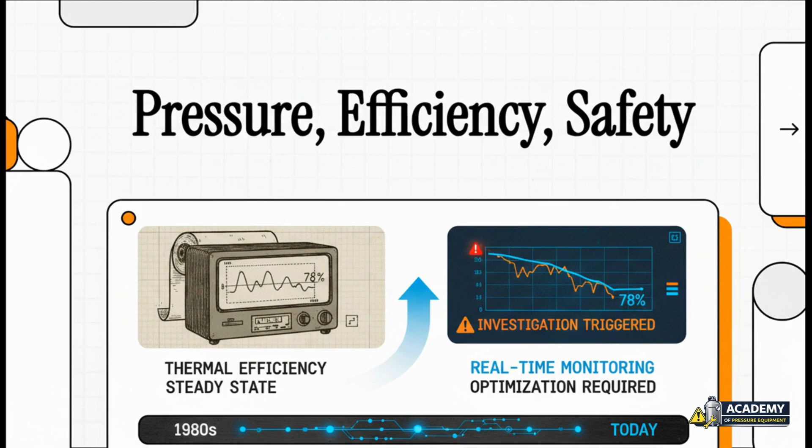Seeing that same number today, well, that would trigger an immediate, full-scale investigation. It's just incredible to think about the sheer scale of energy waste we used to accept as normal. I've seen it firsthand for over 40 years. And really, that's been the common thread through my entire career.

It honestly doesn't matter if you're talking about a brand new state-of-the-art chemical plant or a power station that's been running for 30 years. The basic physics of pressure and heat, they don't change. And neither, it seems, do the ways we just let all that energy escape. It's this massive problem that's hiding in plain sight. It's written in every steam plume you see and every pipe that's warm to the touch.

That's such a powerful image, Edmund. It really points to this kind of institutional acceptance of waste that's, well, it's pretty hard for us to grasp today. That 78% figure you saw scribbled on a chart recorder is now just one data point in a much, much bigger story. So let's really dig in and quantify the true scale of that inefficiency gap.

Exactly. And look, we're not talking about small, little incremental gains here. The difference between that old 78% standard and a modern condensing boiler system that can run at 98%, that's a staggering 20 percentage point gap. Now, stretch that across an entire industry, that 20% represents billions, with a B, billions of euros in wasted fuel and completely needless emissions year after year.

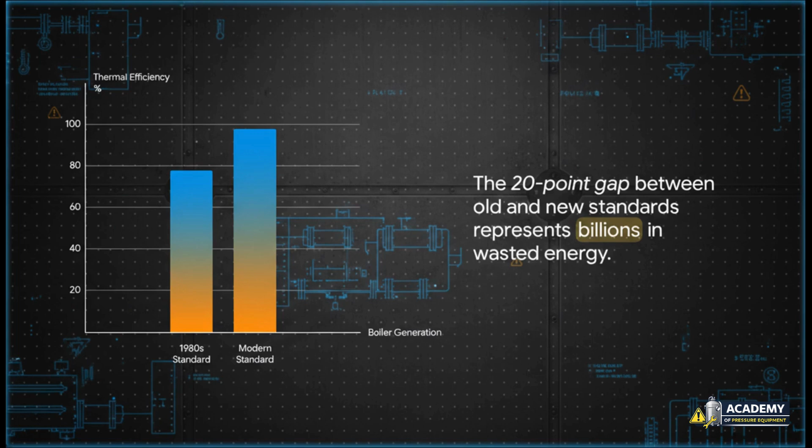It is literally the difference between legacy design and what we can actually achieve now with proper control and heat recovery. A 20-point gap, that's a massive target for improvement. So when you're on site, boots on the ground, what are the biggest culprits? Where is all that energy actually escaping from the system?

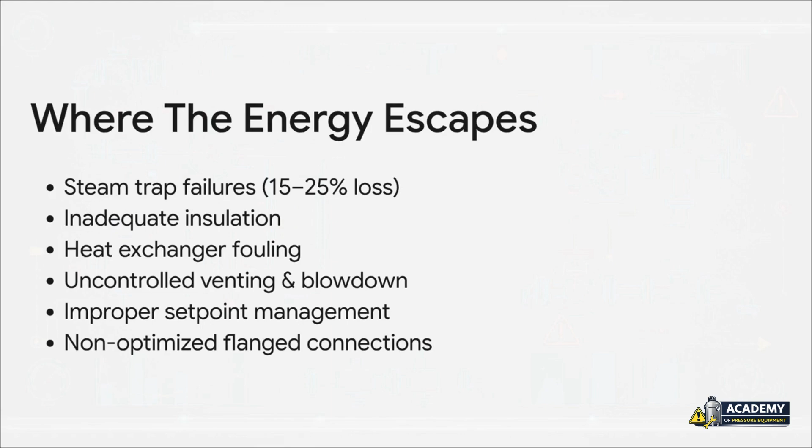Oh, it's a depressingly consistent list, I can tell you. The biggest, loudest offender almost every single time is steam traps. You can walk into an older facility and find that a quarter of them have failed open, just hemorrhaging high-pressure steam straight to the atmosphere. After that, it's all the basic things people forget. Pipes that should be insulated but are bare, heat exchangers that are just slowly choking with buildup, and every single one is a significant and, more importantly, a correctable loss.

And fixing those losses, well, the way we do that has changed dramatically, hasn't it? You've said before that the biggest shift you've seen in your career wasn't in metallurgy or vessel design, but right there in the control room. It seems the move from analog to digital has completely redefined what it means to be an inspector.

Without a doubt. The most profound shift in my 40 years on the job wasn't about better steel. It was about better data. We've gone from being physical detectives to digital forensic investigators. The evidence trail isn't on a clipboard anymore, it's on a server.

Back in the 90s, an inspection meant clipboards, thick logbooks filled with handwritten notes, and physically walking the plant to check gauges. Now, the very first thing I ask for is the audit trail from the distributed control system, the DCS. I want to see every single pressure excursion, every alarm that went off, every single time an operator had to switch a control loop to manual.

That digital log, it's now as crucial for assessing safety and conformity as an ultrasonic scan of a weld. It tells me the real story of how that plant has been operated, not just the idealized version in the design documents. Right, and that data-driven approach is now actually formalized in our safety standards.

When we talk about these automated safety systems, you'll hear a key term come up, SIL. For everyone listening, a safety integrity level, or SIL, is basically a formal way of measuring the reliability of a safety system. It's all laid out in the international standard IEC 61511. It puts a number on the risk reduction that a system gives you, like a system that stops a vessel from overpressurizing. And for high-risk equipment, verifying this is now a huge part of your assessment, Edmund.

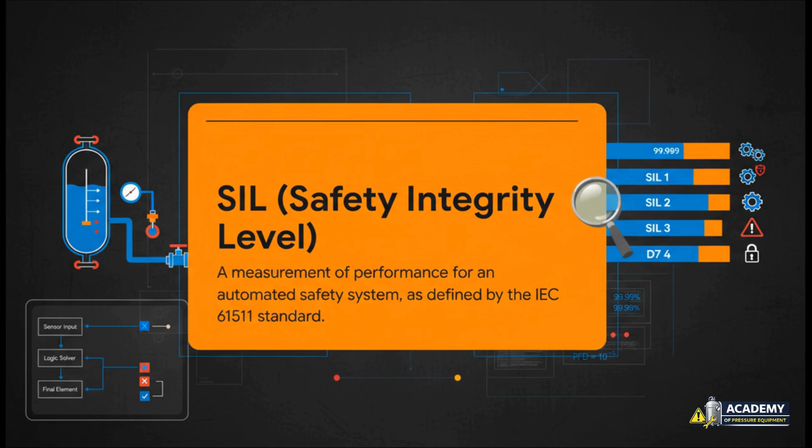That's absolutely right. And the quality of that safety function, and frankly, the entire control system, it all depends entirely on the quality of the data coming in. The sensors we use today, well, they're what made this whole digital revolution possible in the first place. Okay, so let's talk about that evolution.

Because the ability to actually trust that DCS audit trail is directly tied to how sophisticated the instruments feeding it are. How has that technology changed over your career? Oh, it's like night and day. In 1984, all we had were analog gauges. You literally had to trust your own eyes.

Then, in the 90s, we got the first electronic transmitters, which was a huge leap. But then the 2010s brought wireless protocols like WirelessHART. Suddenly, we could put sensors on remote parts of the plant that were total blind spots before, and we could spot leaks or failing insulation.

And now, in the 2020s, we've got fixed thermal imaging cameras tied right into the control system, constantly scanning for hotspots. We can literally see the energy being lost in real time. These new sensors aren't just measuring, they're diagnosing their own health, which gives us a level of trust in the data that we just never, ever had before.

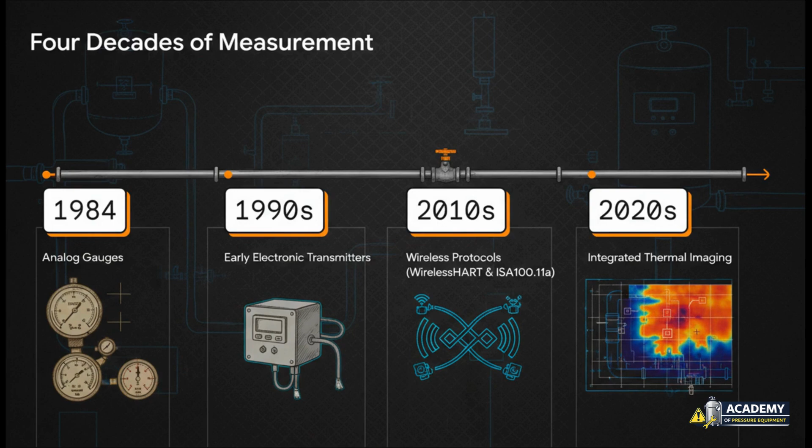Okay, so we have better control systems, and they're being fed by much smarter sensors. Let's ground all this in reality. Can you give us a few specific, anonymized examples from your actual field reports where this tech has made a concrete, measurable difference to both efficiency and safety? Of course. The theory is one thing, but it's the results out in the field that really matter. I've got 3 cases that I think illustrate the impact perfectly.

Okay, so the first one was at a refinery over in Central Europe. They had a crucial heat exchanger that was just heavily fouled. It was operating at only 61% of its design efficiency. To make up for it, they were just burning more and more fuel in another heater downstream.

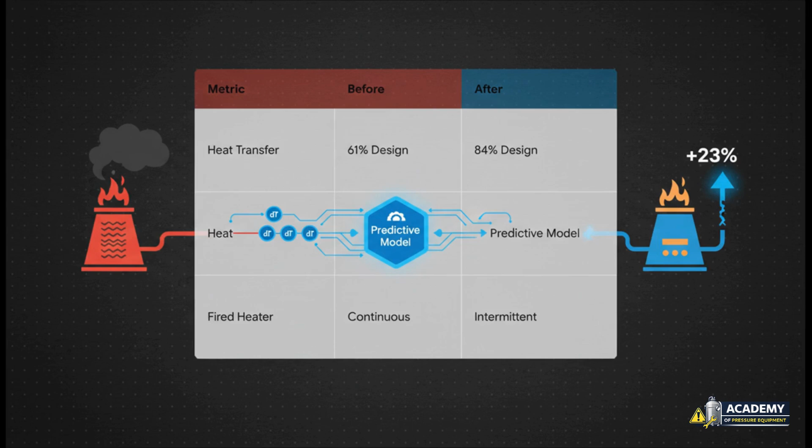So they installed a simple network of temperature sensors and fed that data into a predictive model. This allowed them to schedule their cleaning based on actual performance, not just some date on a calendar. The result? They recovered 23% of the lost heat duty. And get this, that was enough to take an entire fired heater out of continuous service. So that's a direct, massive fuel saving right there.

But what about the connection between better control and the actual life of the asset? Well, this second case from a chemical plant in Germany is a perfect example of that. They had a group of process vessels that were suffering from chronic pressure cycling. The pressure was just constantly going up and down, all because of a poorly tuned control loop in their DCS.

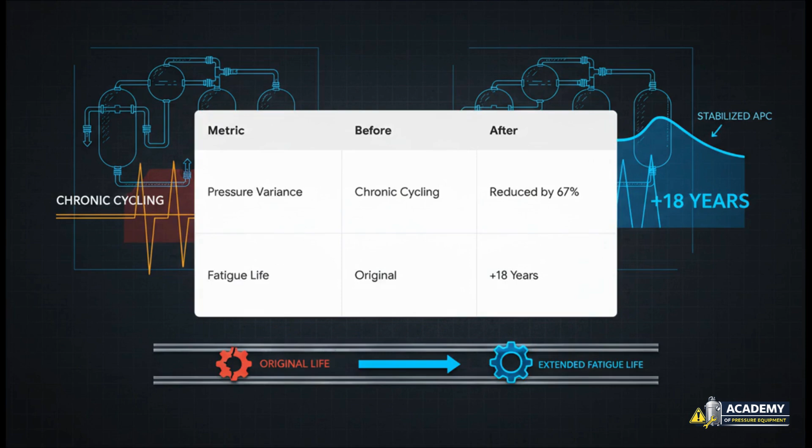By putting in an advanced process control, or APC, algorithm, they stabilized the whole system. The pressure variance was reduced by 67%. Now, the immediate energy saving was pretty small, but the really crucial outcome was the reduction in that cyclical stress on the vessels themselves. An engineering analysis estimated it added an extra 18 years to their fatigue life. That's a multi-million euro replacement program they just kicked down the road, all thanks to better software.

And the third case, this was at a petrochemical site in the UK, brings us right back to my old nemesis, those steam traps I mentioned. They rolled out a wireless acoustic monitoring system across their entire 3-kilometer steam network. The system basically just listened for the telltale sound signatures of failed traps. It very quickly found 34 traps that had failed in the open position.

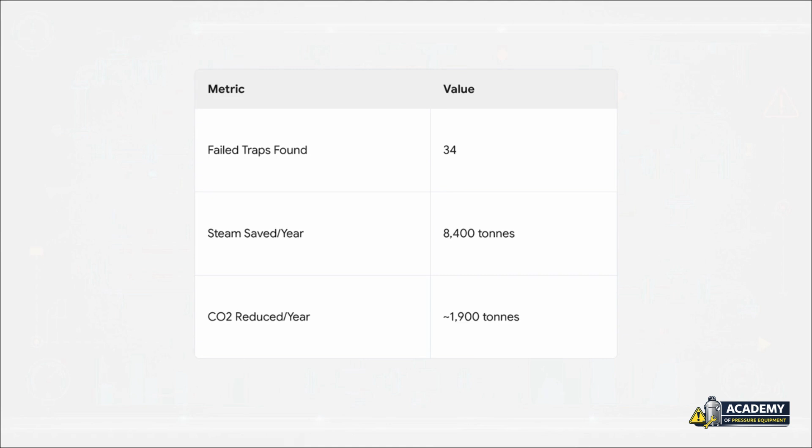Once those were repaired, their steam consumption dropped by 8,400 tons a year. That works out to a direct CO2 reduction of 1,900 tons annually. To put that in perspective, that's like taking hundreds of cars off the road for good. Those are incredibly powerful examples of what's already possible.

So let's shift gears and look forward. Based on all these trends, you've laid out 5 key predictions for the next decade. I'd love to go through each one and maybe play devil's advocate a little bit. Please do. The future is rarely as straightforward as we think it's going to be.

All right, my first prediction is that AI tools, specifically these large language models we're all hearing about, will start to pre-analyze the enormous technical files we have to review. Imagine an AI that can cross-reference thousands of pages of drawings, calculations, and material certificates, and then flag any potential issues for the human inspector to focus on.

I can definitely see the appeal in terms of speed, Edmund, but the whole Pressure Equipment Directive is built on human judgment and experience. Can an AI really understand the nuance in a complex design calculation or a welding procedure? Aren't we running the risk of over-reliance here, where we just start accepting the AI's pass without the human scrutiny that's kept these plants safe for decades?

My next prediction is that we're going to move away from these fixed, time-based inspection intervals. Inspecting a vessel every 5 years, whether it needs it or not. I see us moving towards continuous online monitoring.

Think about permanently installed sensor arrays like phased array ultrasound on critical welds, feeding data back in real time. We'd inspect based on the actual condition, not just the date on the calendar. The technology is certainly getting there, I'll give you that. But two big challenges jump out at me.

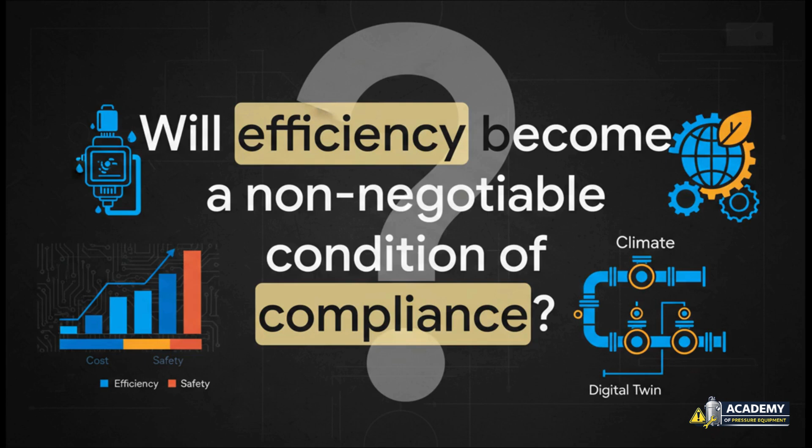That is powerful and direct advice. And it leaves us with a final question for everyone listening, and really for the industry as a whole. As these lines between safety, cost, and climate continue to blur, will efficiency stop being just a commercial goal and instead become a non-negotiable condition of your license to operate? The evidence we've talked about today suggests that future might be a lot closer than many of us think.